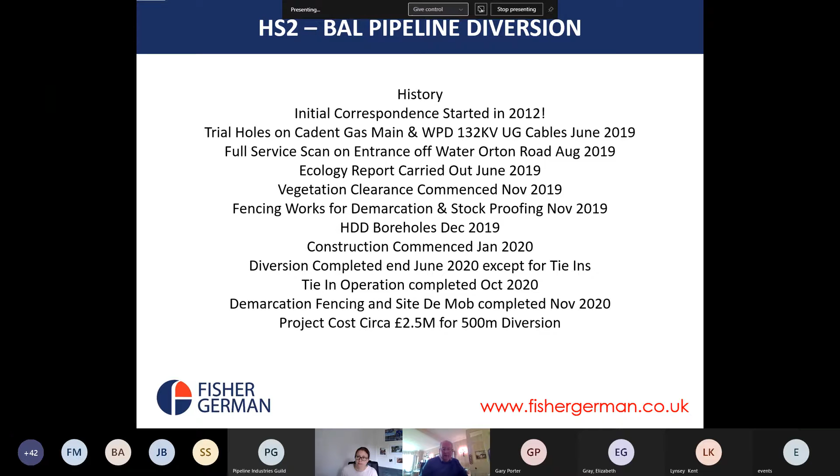So I'm now going to see if I can start this. Yeah, here we go. Has that moved on?

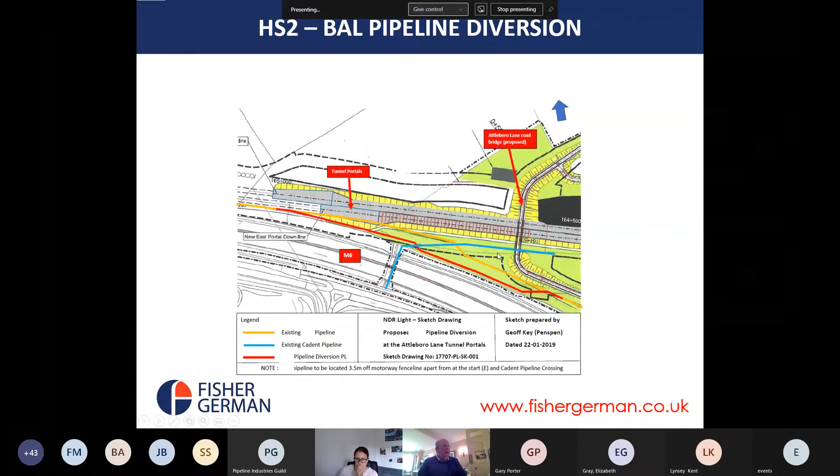In more detail, we've got this tiny slither of land here, which is quite complicated. It belonged to Highways England, and this was purchased by HS2. But we needed to shift into the toe of the M6 to get our distance from the portal buildings.

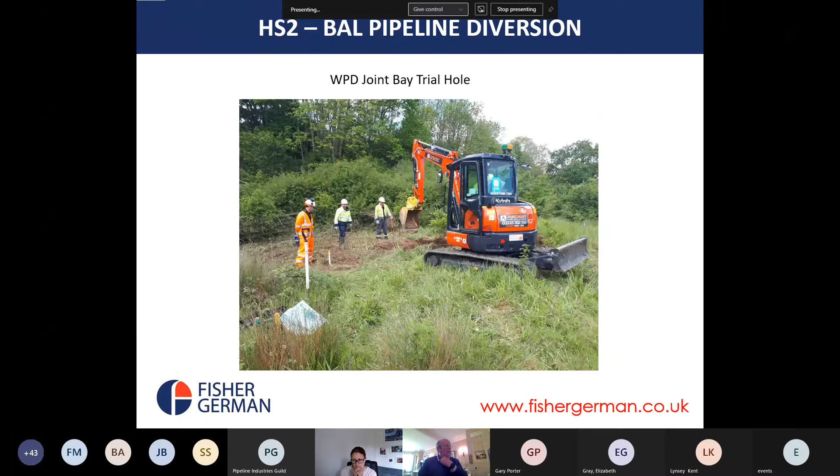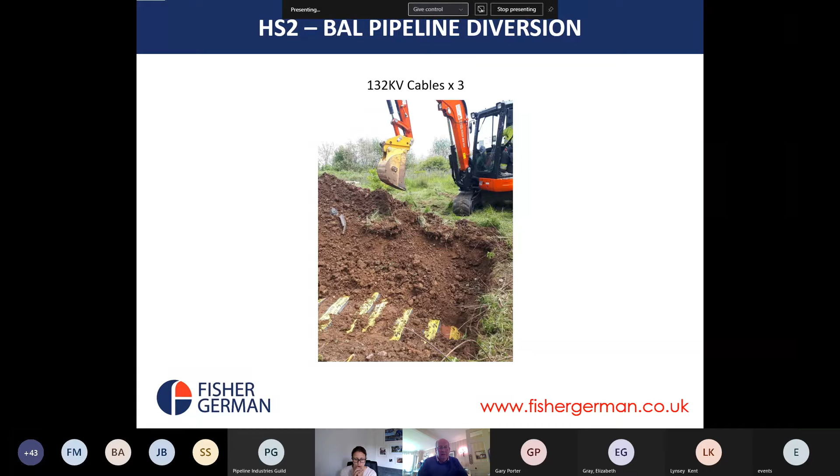We started on site last summer, trial holes to establish where the 132 kV cables were, and we had a complete bank of them. There was a joint bay just behind, in front of the digger, on the other side of the open excavation, with 3 different cables running out of that joint bay.

We also had to trial hole down to the Cadent high pressure pipeline, and we got that to a depth of 2.7 meters, so we could then plan the HDD profile accordingly.

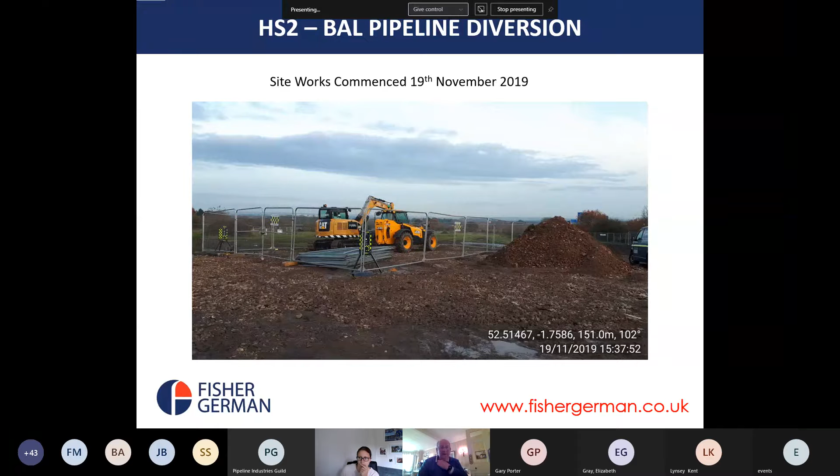Works started on the compound in November 2019. That's the compound there, just off the Water Orton Road here.

We had to remove all the hedges. There were 3 hedges to remove in total, about 20 meters of each section.

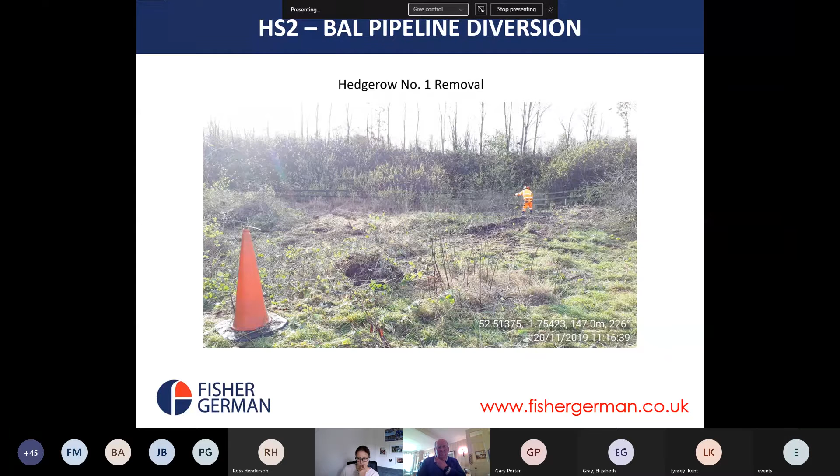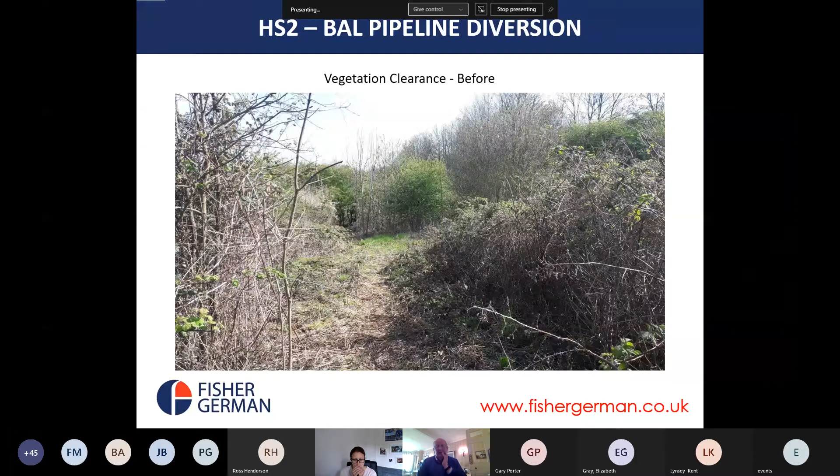This is the vegetation we were contending with. It's highly overgrown and full of brambles and self-set trees, etc.

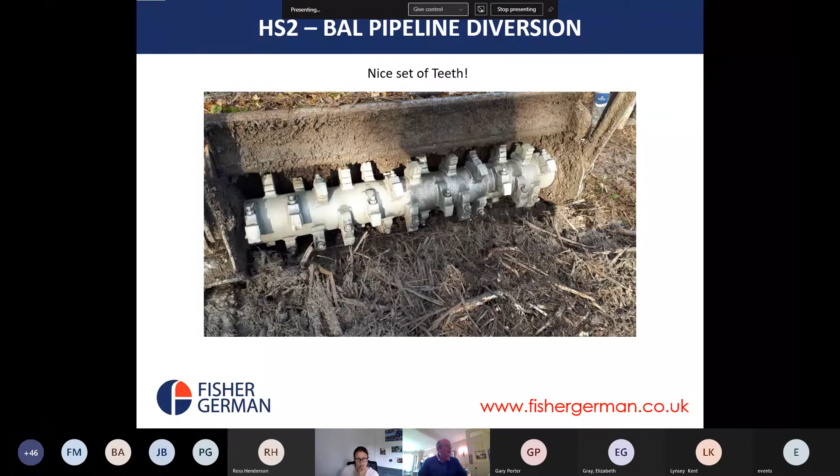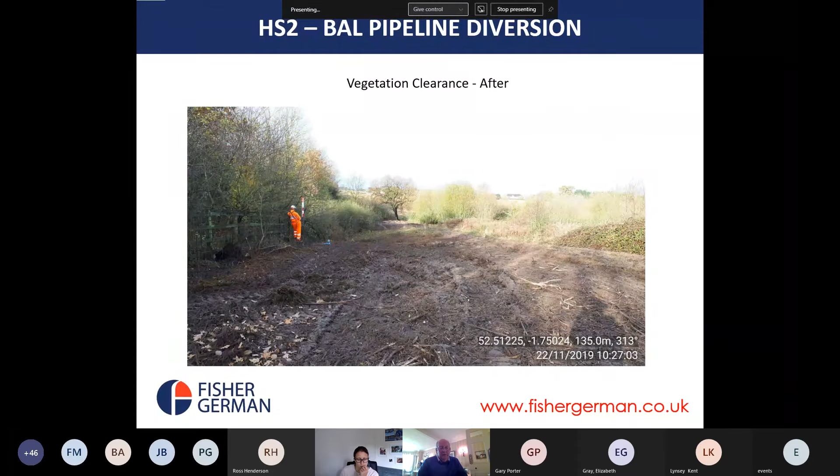That's the result after the machine had been through, it just mulches it all up. If you remember the view from a few slides earlier, it's a completely different picture now. That's the job where the trees were at their thickest.

We then had to remove an oak tree as well. It did HS2 a favour because it was right in the entrance to the tunnel portal anyway, and for those concerned, it was riddled with honey fungus, so it wasn't going to last much longer.

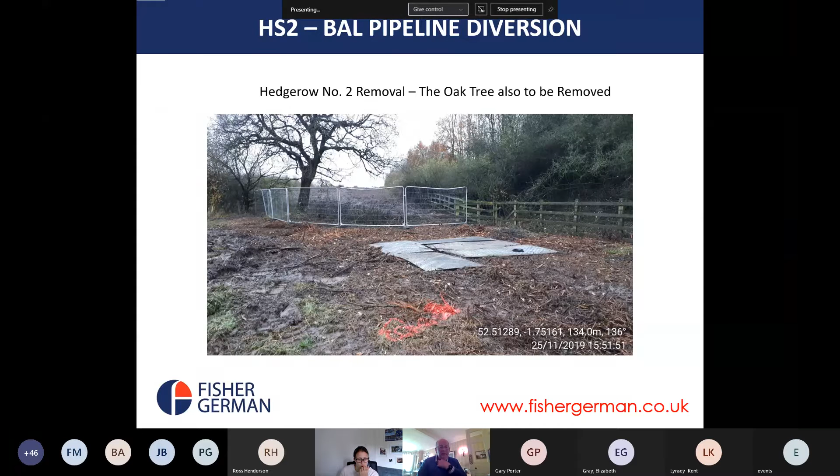Here you can see in November 2019 it absolutely turned into a mud bath. We were trying to fence off the existing easement here to make sure that the running track down to the main diversion site didn't affect the current pipeline easement.

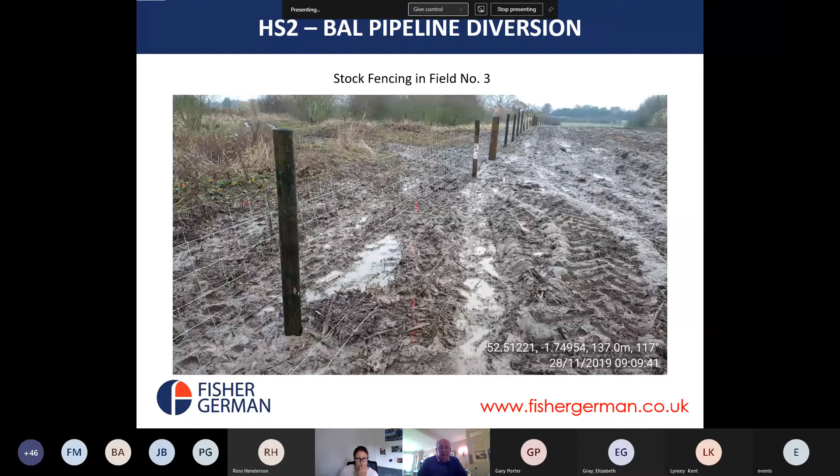Once we got that done, we fenced off the stock in fields 2 and 3. And then this is looking...

...upstream. You can see an aerial marker post here, that was the field 3-4 boundary. And this is our tie-in point, the upstream tie-in point.

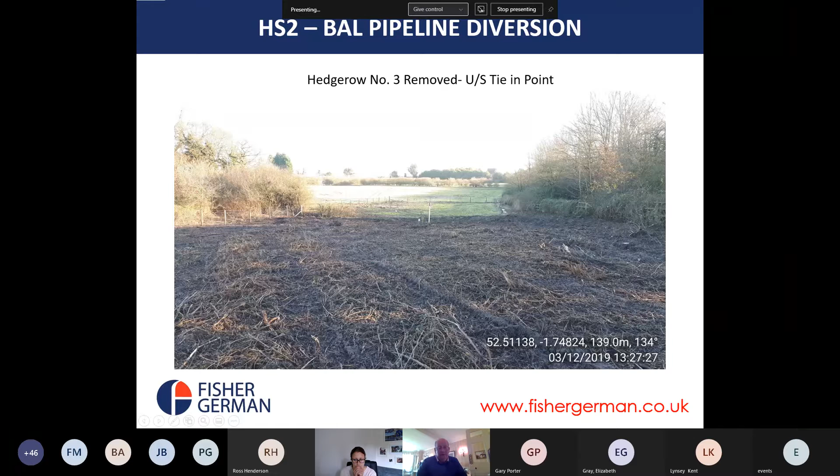And that's what we were dealing with at the end of 2019, an absolute mud bath. But do remember that picture, because it's going to be very interesting when I come to it later on in the presentation.

So this is the downstream tie-in point, and this is the point where we have to go into the highway embankment here and push back up the embankment.

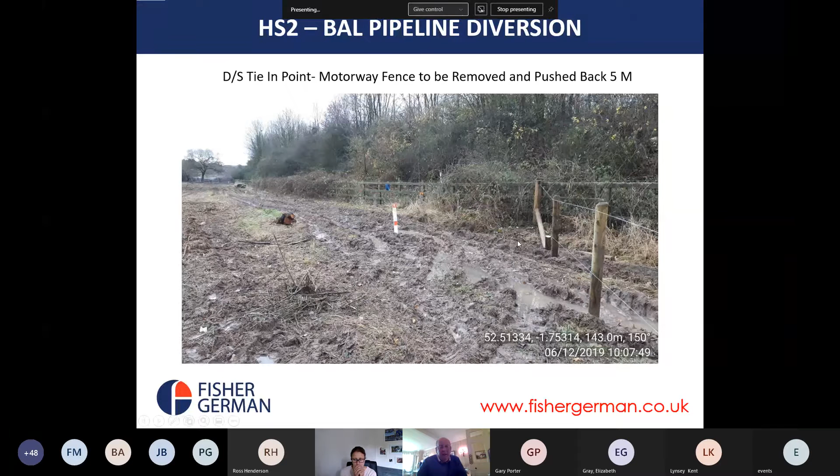So we removed all the vegetation behind the highway fence, got rid of the oak tree, and then you can see the contractors reinstated the highway fence 5 meters up the bank, to give us a 5 meter clear easement in the future.

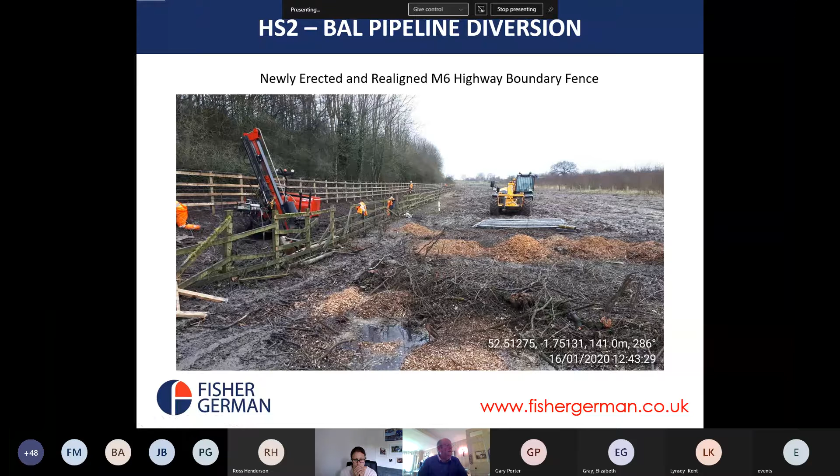So that slither of land has now been transferred, or is in the process of being transferred, to HS2 from Highways England. And that's the job done, fence realigned.

It doesn't get any drier. This is what we had to contend with, or the fencing contractor had to contend with, in early January 2020.

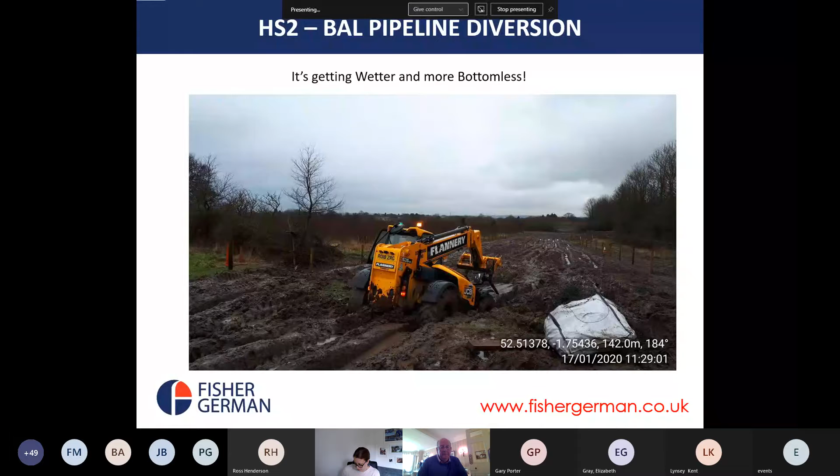The contractor arrived on site on the 21st of January, and the first job was to basically put the bell mouth in off the Water Orton Road into the site.

And then that's it, all stoned up and a smooth, seamless run off the road into the compound area.

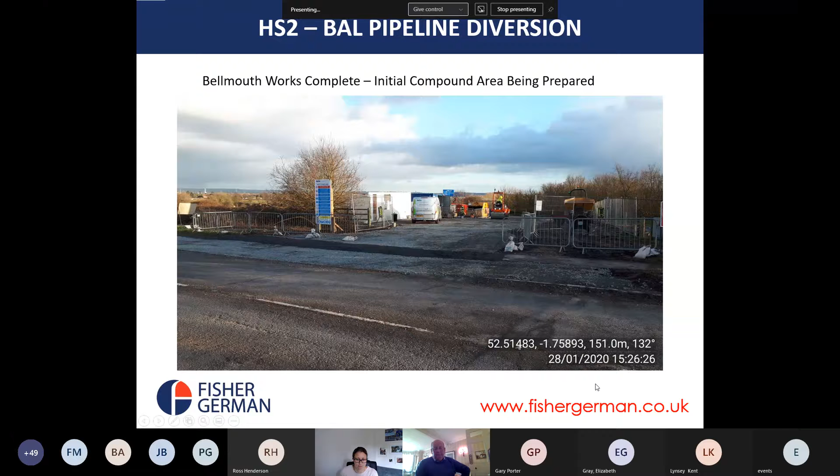We had to lay down terram and stone, and this is to the main construction compound here.

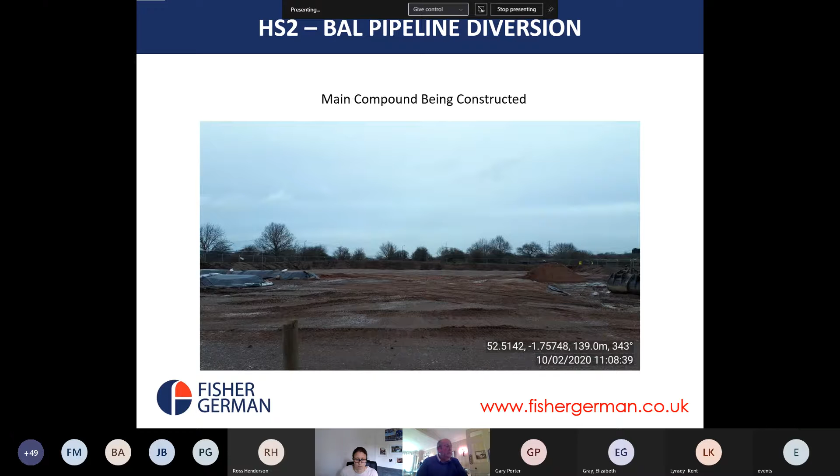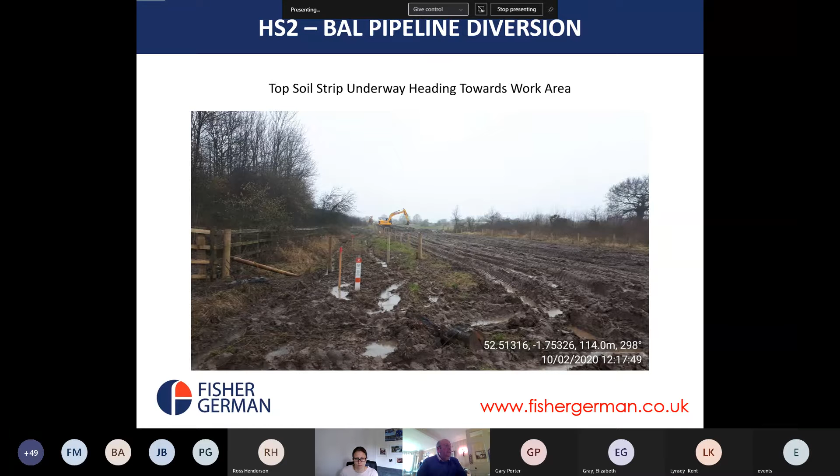Topsoil strip underway, and this is still heading towards the working area. I put topsoil stroke mud because if you remember that previous photograph, it was a lot of mud.

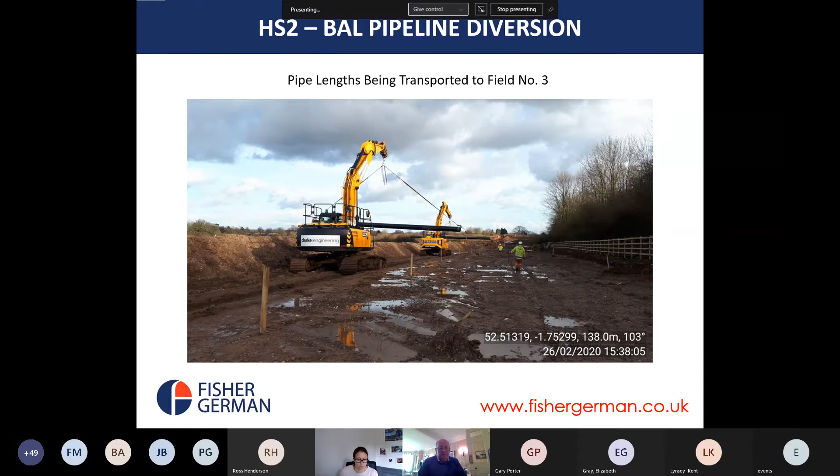This is all the line pipe arriving at the main construction site, being unloaded. Then it's a painstaking process of transporting it down the spread to the working area, for storing up, ready for stringing out later on.

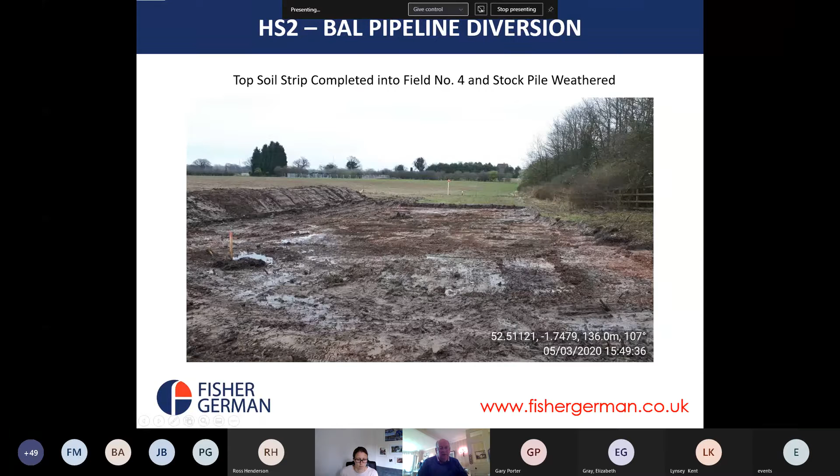Topsoil strip completed now and into field 4, and this is really important to get it weathered, i.e. you smooth it down with the back of a bucket to keep the weather off it. Remember, keep that vision in your memory of the mud, because that's what's underneath that.

And then we've still got to contend with the fact that we've got our existing asset in the ground, so we had to put bog matting down for vehicle crossings on our existing asset.

This is looking downstream from the upstream tie-in point, so the first point where the pipe diverts with the flow of the fuel, and this nicely weathered bund all the way along the edge here.

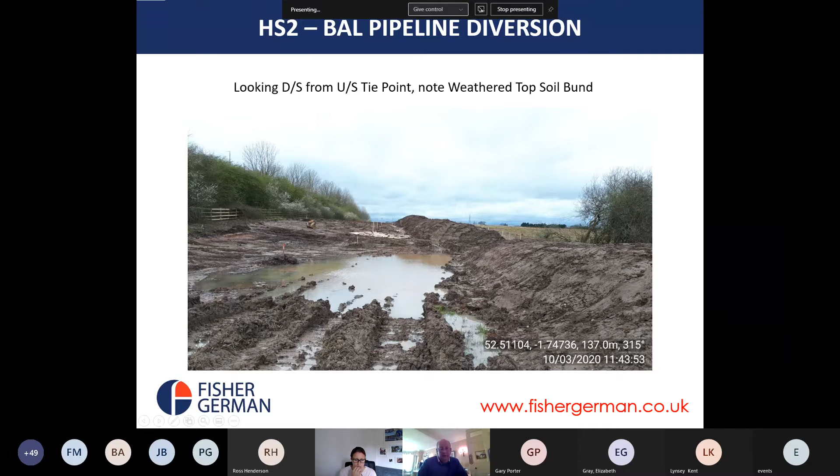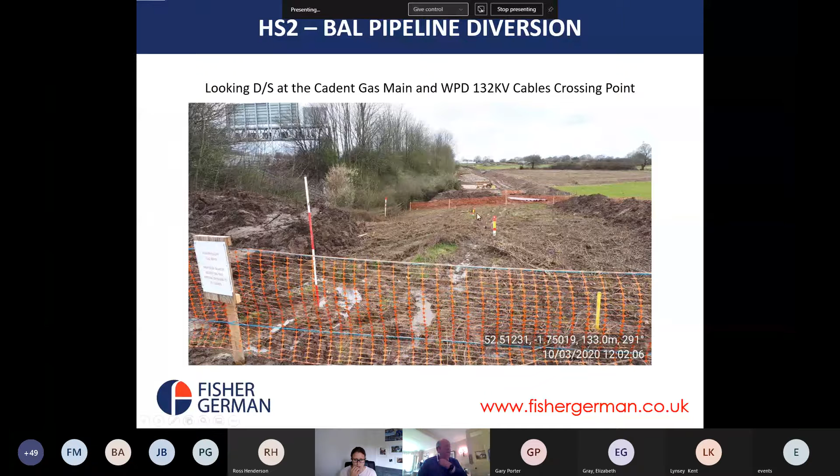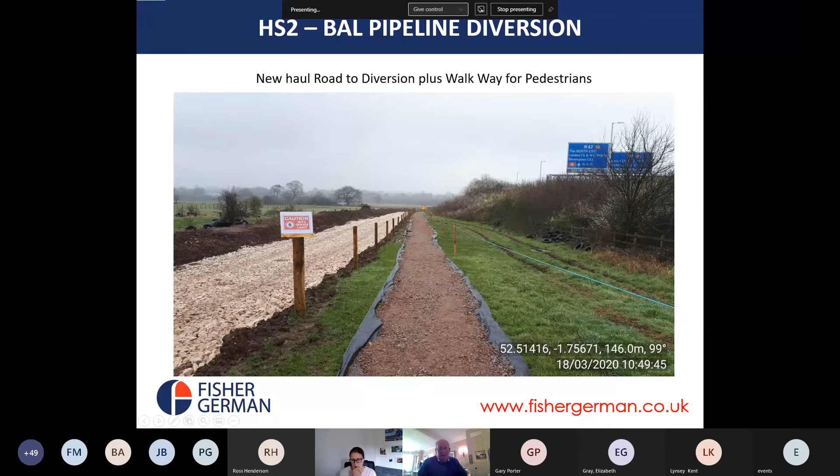You'll remember that the vegetation was extremely thick, and none of our service searches showed up an unnamed storm drain, which we uncovered outside the working area. We couldn't just leave it there, so we had to get a specialist contractor in to deploy a camera and trace the drain, which we managed to do.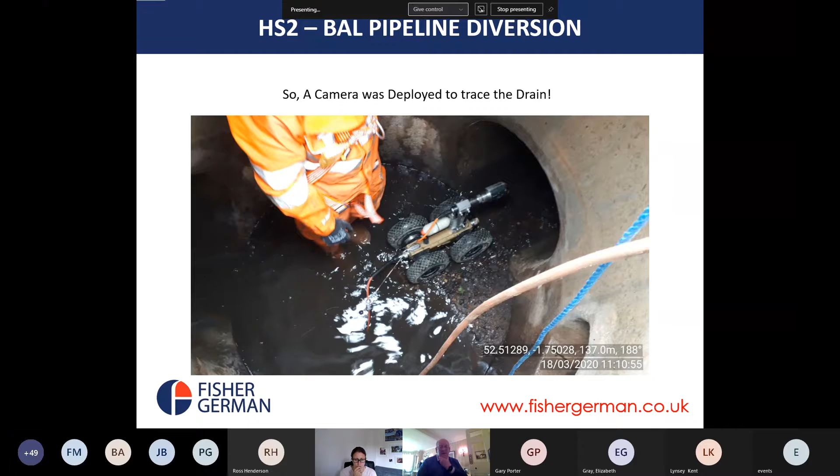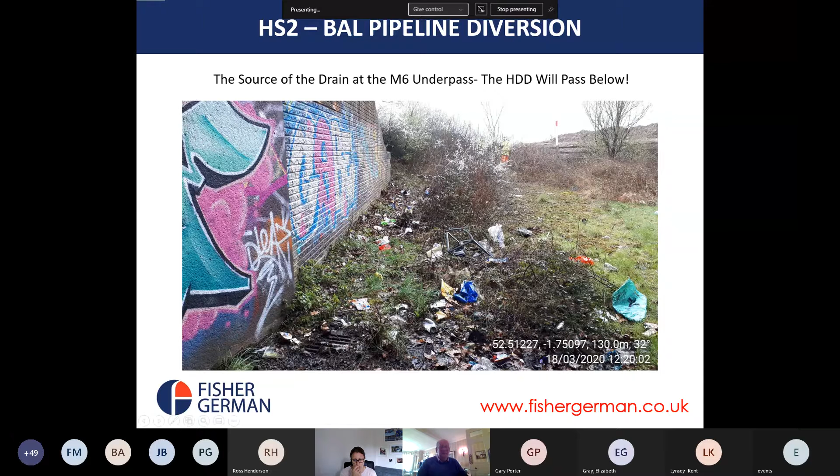They get imagery back to a Toughbook screen of what the camera can see down there, and we found that it emanated from this. If you can see, there's a drain cover there, and that's where the drain ran from, and that's probably about 150, 200 meters away from the drain cover we put the camera in.

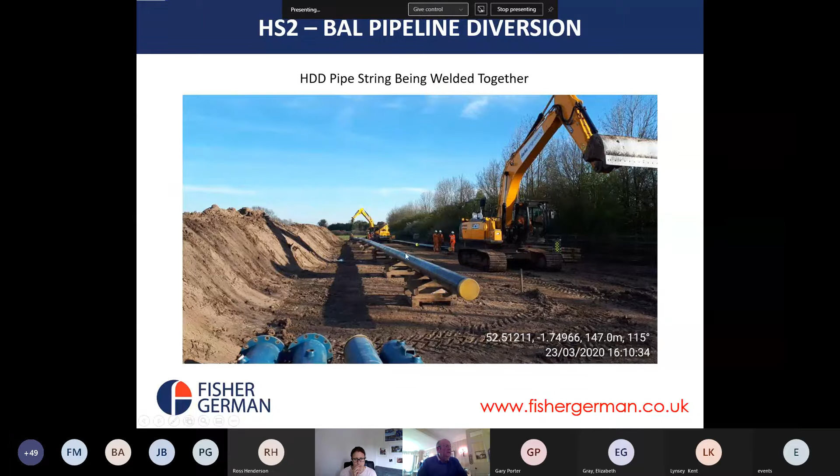Very nice working conditions. And this is the HDD string being put into position, ready for later on.

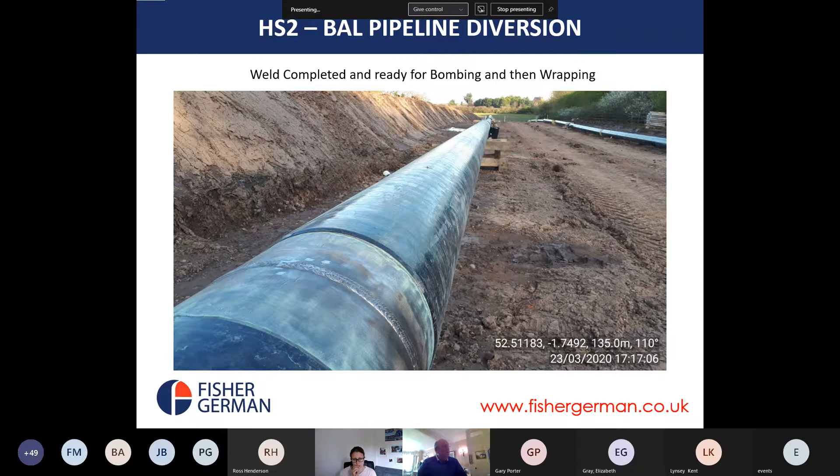This is just a few construction shots of the process of a diversion. So welding up the pipeline joints, and that's ready for inspection, or bombing as they say, or X-raying, and then wrapping, subject to it passing its tests.

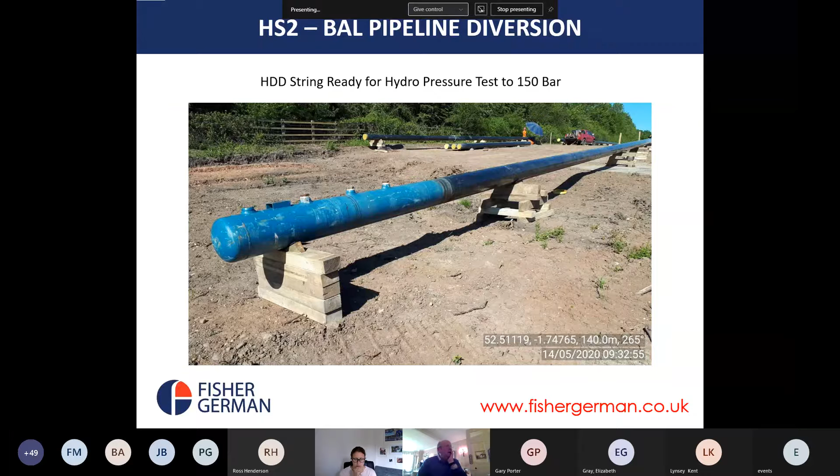So this is the string all welded up, ready for the hydro test, which is up to 150 bar to make sure that it's all going to be okay.

And a nice aerial imagery shot from the aerial patrol, showing this is the HDD string here, ready for pulling back.

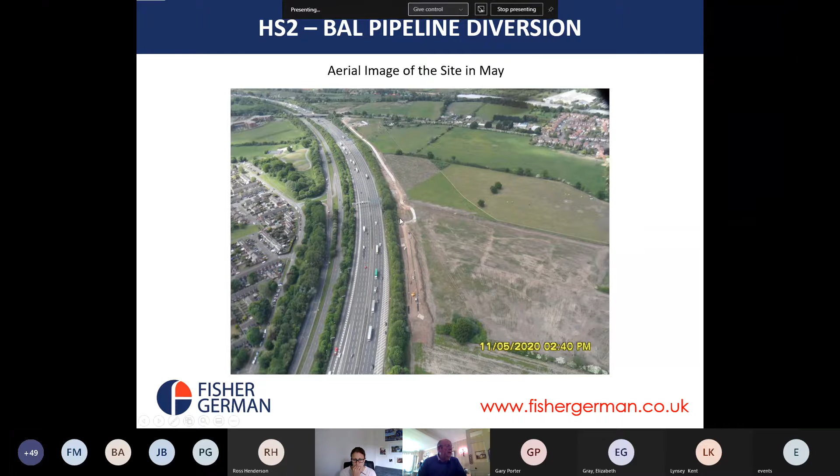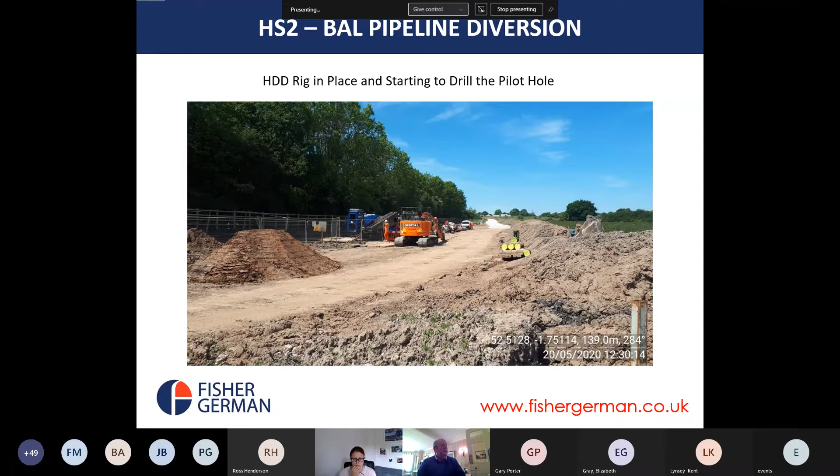And that's the drilling rig in place, just starting to drill the pilot hole, the first shot through, and you can track the head with this device, and you can see that it's actually on the screen. We've got a depth of 11.22 meters below existing ground level for the drill head. So that's well below the Cadent gas main and well below the 132 kV cables and their joint bay.

So that's the first shot coming through. It's come through from all the way down about here, about 150 meters, and come out the ground.

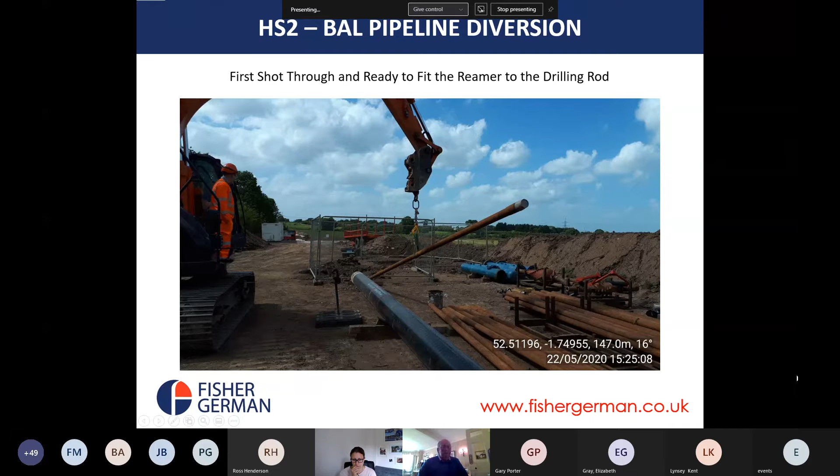That's the HDD string all ready for pulling back. Meanwhile, further upstream from the HDD, we're getting the pipeline trench ready to lay the pipeline as standard in the pipe trench. In the forefront of the picture, you've got what's known as a bell hole, which helps make it safe for welders to weld up the main sections when it's actually in situ in the ground.

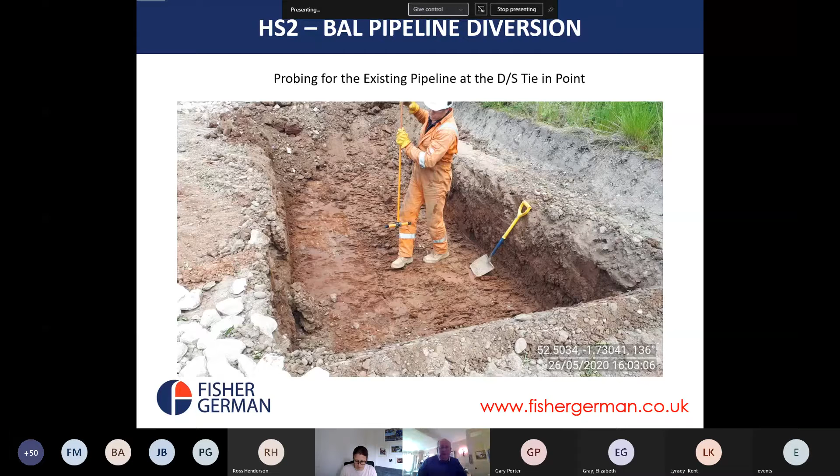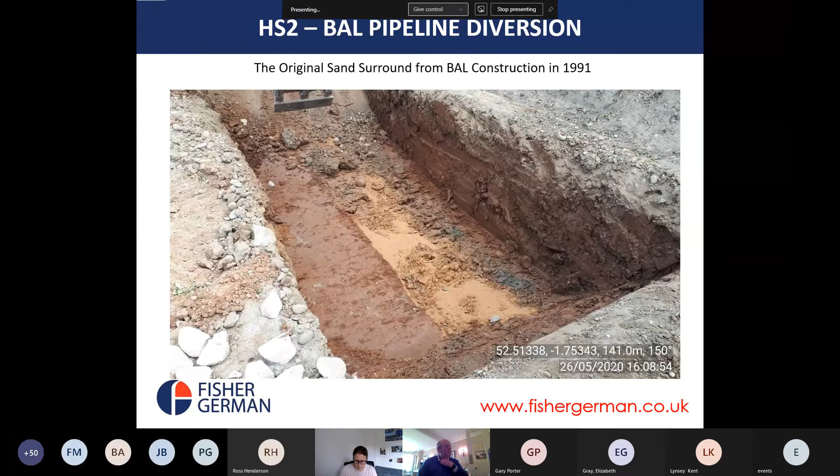This is probing for the existing pipeline at the downstream tie-in point. If you look there, it's very easy to see the sand that was put on the surround from the construction of this pipeline back in 1991. So he's exposed the pipeline.

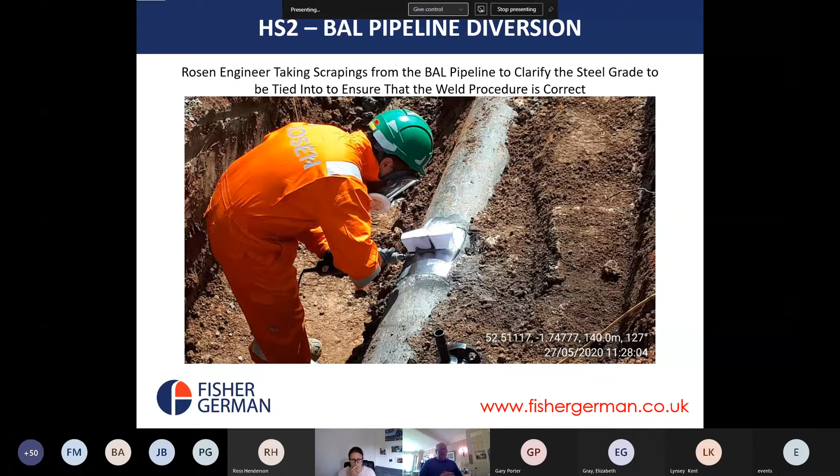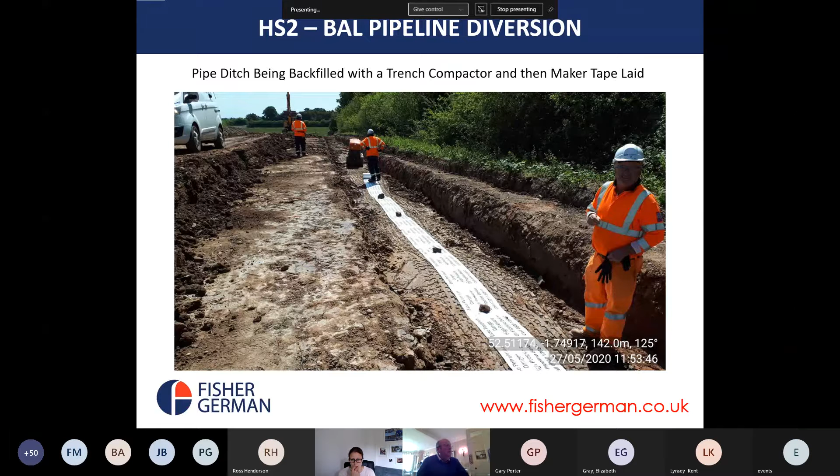That's the pipe being backfilled, the trench compactor, remote control trench compactor, and then marker tape being put above it.

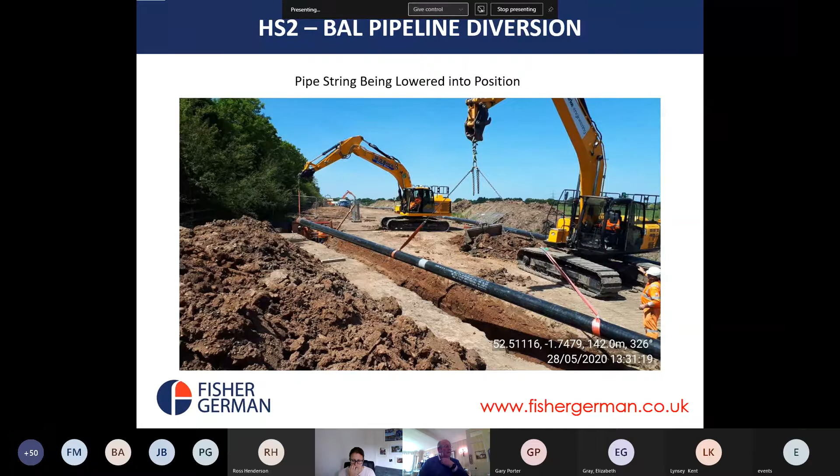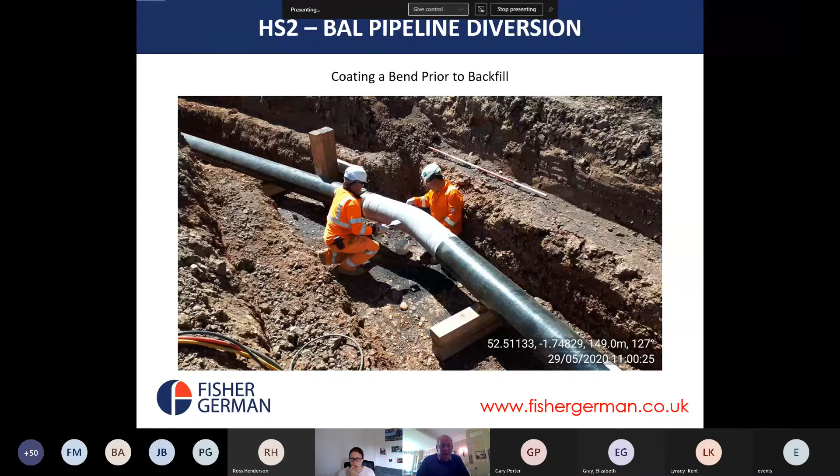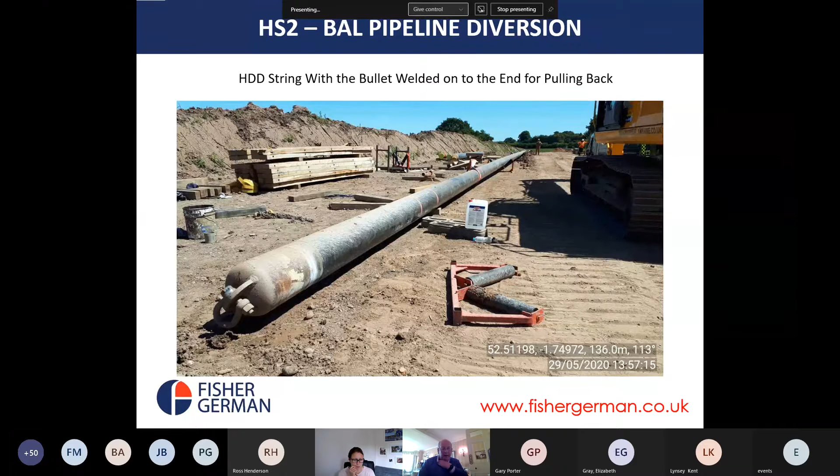And this is the HDD string ready with the bullet welded on the end for the pullback. There's a dirty great big shackle on the front of that to hook onto.

So in order to get the correct angle, we had two 20-ton machines in position to lift the pipe off the runners, and that gives you, if you get it high enough, the correct angle to pull into the ground. That's the trajectory it will continue into the ground at.

And that's being shackled up, the bullet shackled up, ready to go. You can see in this picture the back reamer here, and this will rotate as it goes in.

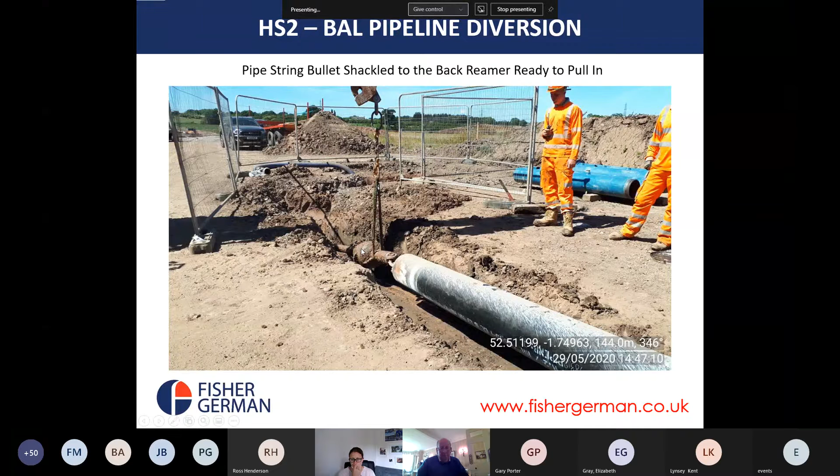It's another shot. And that's the job done. Pipe string successfully pulled through the HDD profile. So we can say goodbye to the rig, job done.

And that's what we're left with, a piece of pipe sticking out of the ground. And that's ready for the next stage.

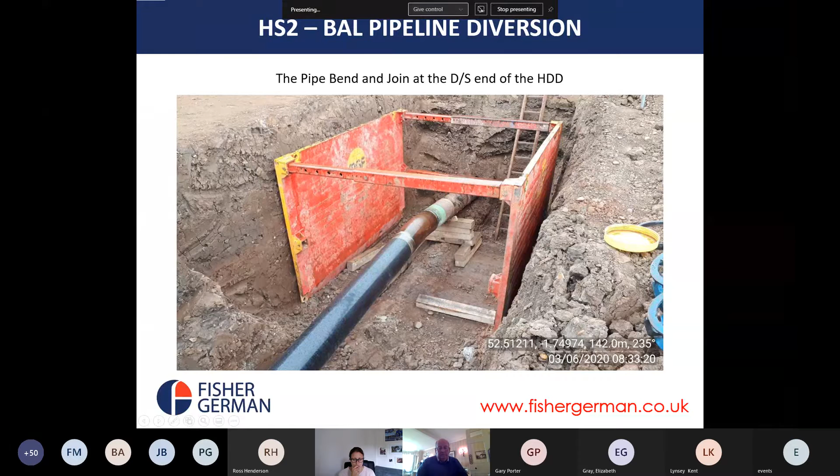So we put on the bend, a 22-degree bend, to get it to the right position, so you have to dig down the pipeline a bit, then cut it and weld it in. It's just a change of direction here.

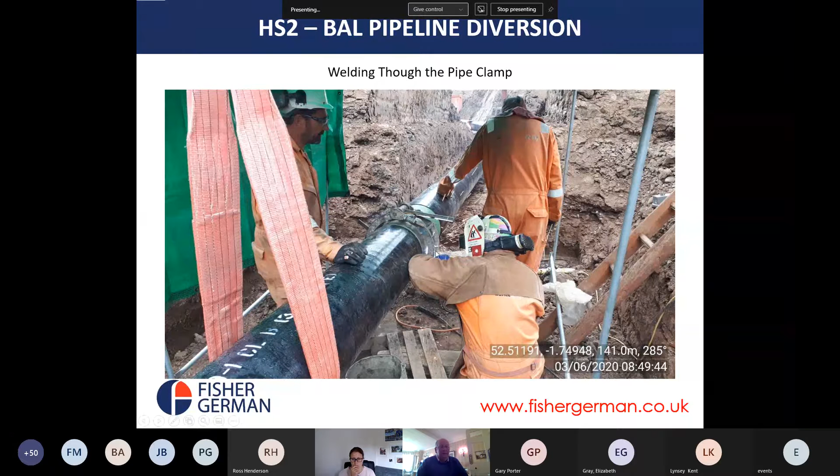This is a close-up. They have these open clamps which hold the pipes in position for the welders to weld through the clamp. And that's it just being completed. You take the clamp off once you've got it started and it's all secure and in the right place, then you can complete the weld.

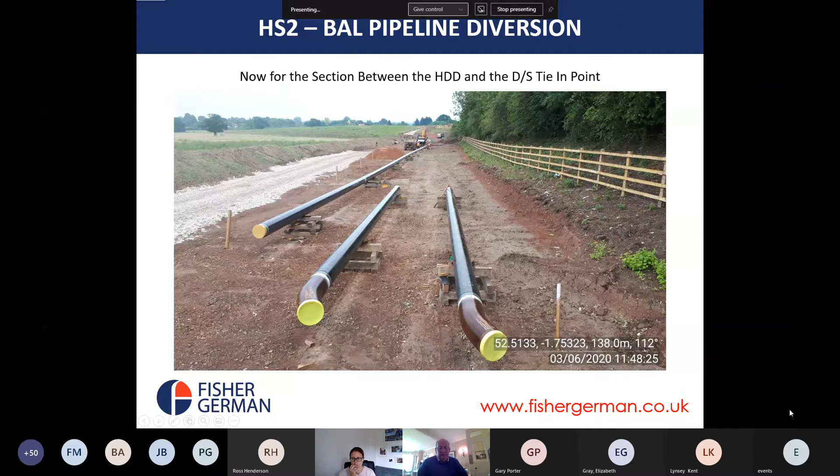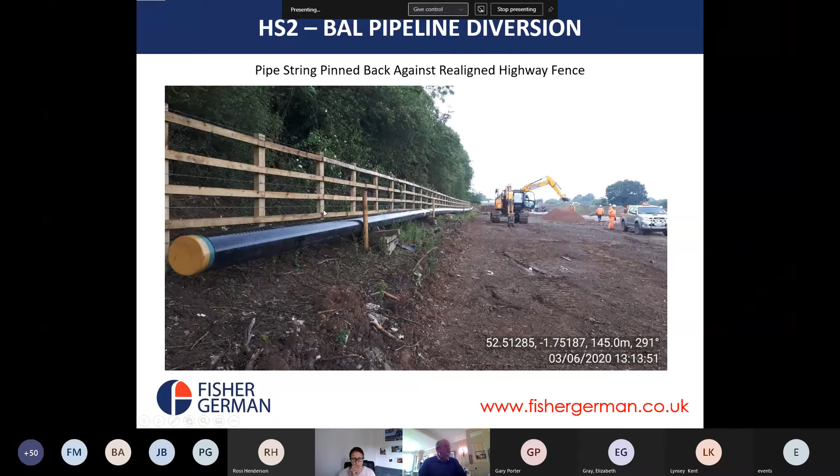Now for the section between the horizontal directional drill, which is down here, and the downstream tie-in point. If you remember, this is the area we claimed back from Highways England, so we had to peg the pipe back up against the fence here. This is where the trench is going to go.

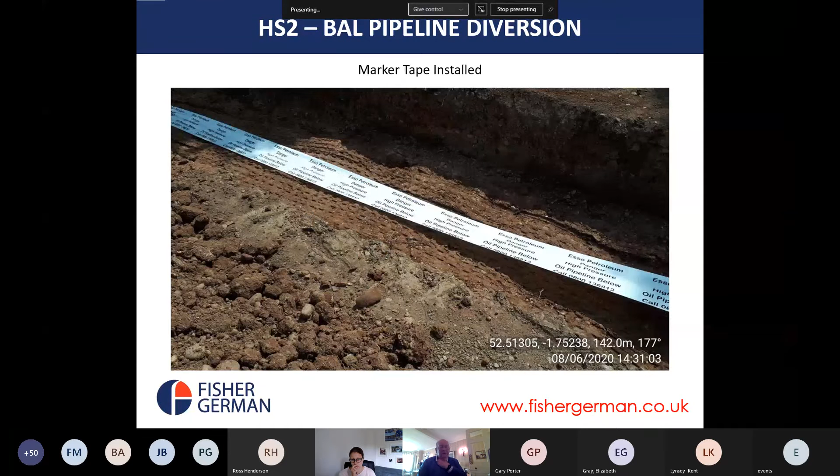So the topsoil reinstatement commenced just downstream of the upstream tie-in point, and I will now refer back to the image you saw of the really wet conditions and the topsoil being put into a bund which is weathered. When you do that, your soil will come out in good condition for reinstatement.

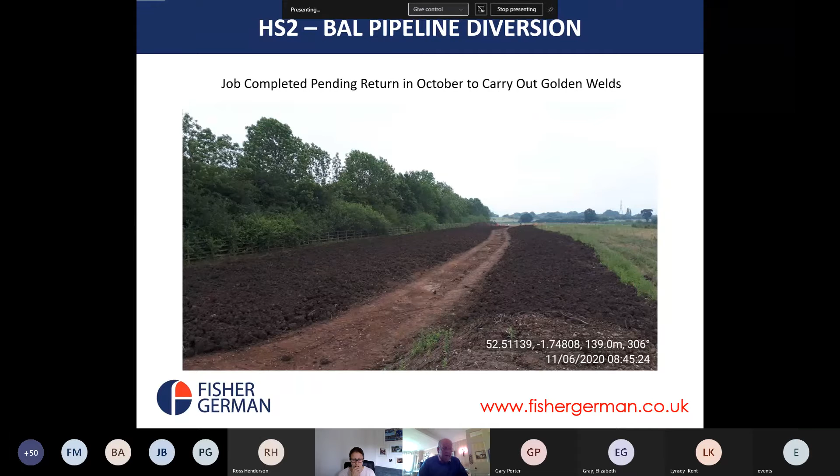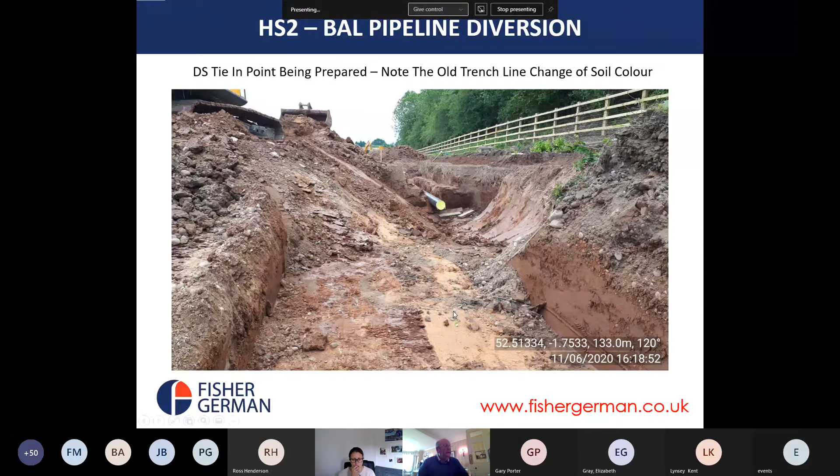And that's the bend line up that was welded up back in the summer and kept on site to go from one pipe to another. So you still have to do the pressure test on that little bit.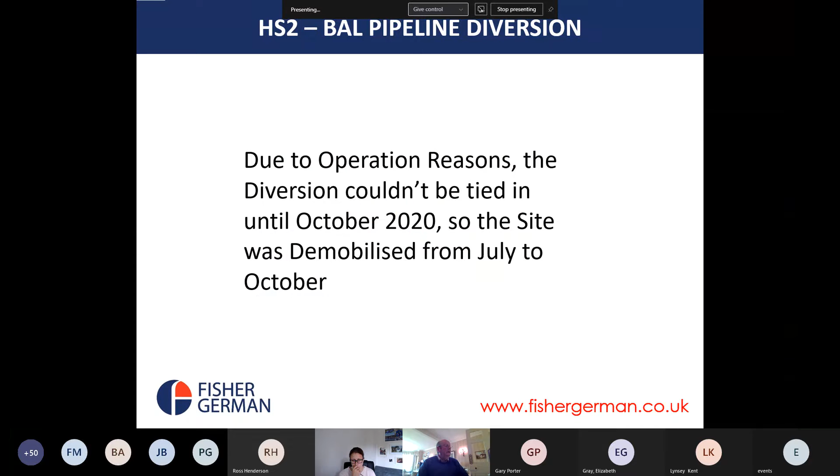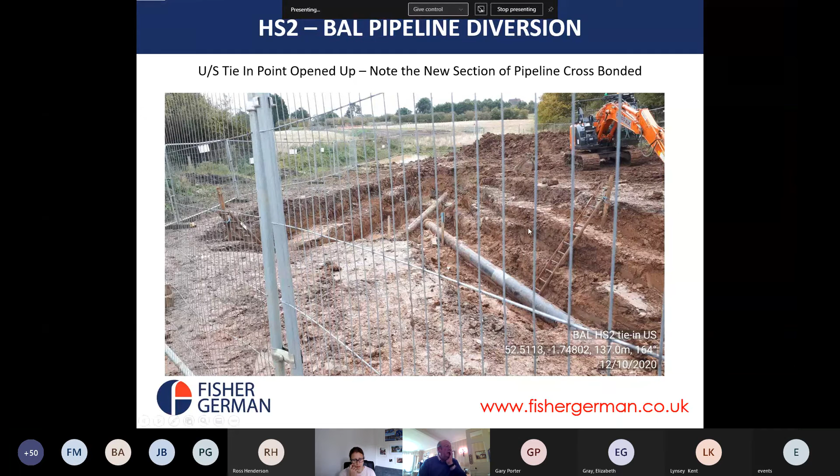Right, this is the tie-in point, week commencing the 12th of October, back to wet weather. So we exposed both pipelines again. So we've got the existing one here, and this is the diverted section.

And again, at downstream tie-in point, this is once you've cleared the pipeline with nitrogen gas, this is actually tapping into the existing line to prove that it's empty. And then once you've done that, you can cut the section away, and therefore we've got this, the old pipeline, and this is the new bit.

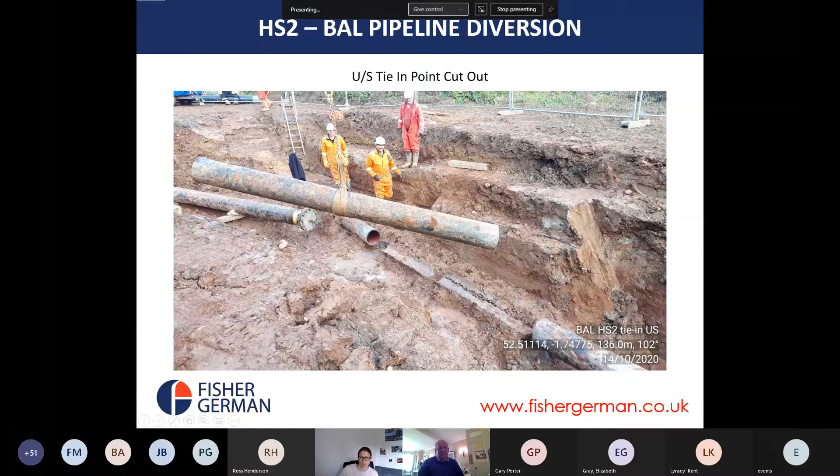And this is a pipe being prepared for welding, and this is a good bit of kit here. Now I'm a farmer also as well as being a pipeline agent, and when I had one of these in my workshop, it was called the hot spanner, but it actually is an oxyacetylene torch, and you can crank it. There's a little handle there, and you wind it round on these wheels, and it gives you a nice cut at the right angle for then dressing out, and then in preparation for welding.

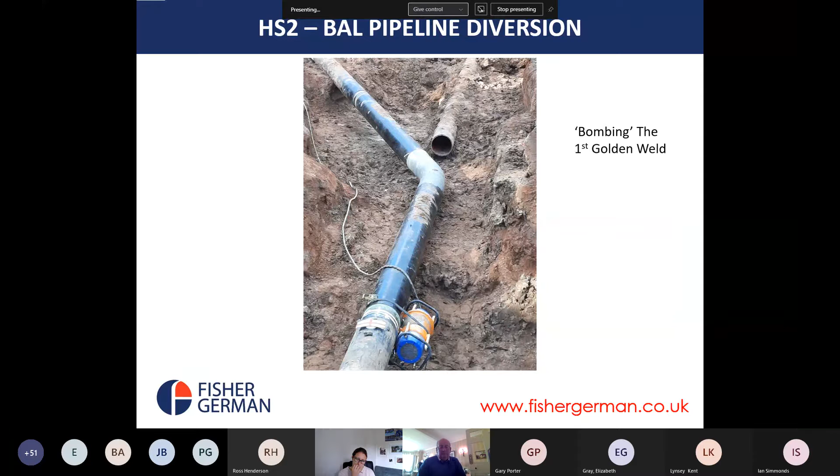And that's the golden weld completed and ready for X-ray, and that's the X-ray machine. We call it bombing in the trade, for the first golden weld. And that's the job done at the upstream tie-in point.

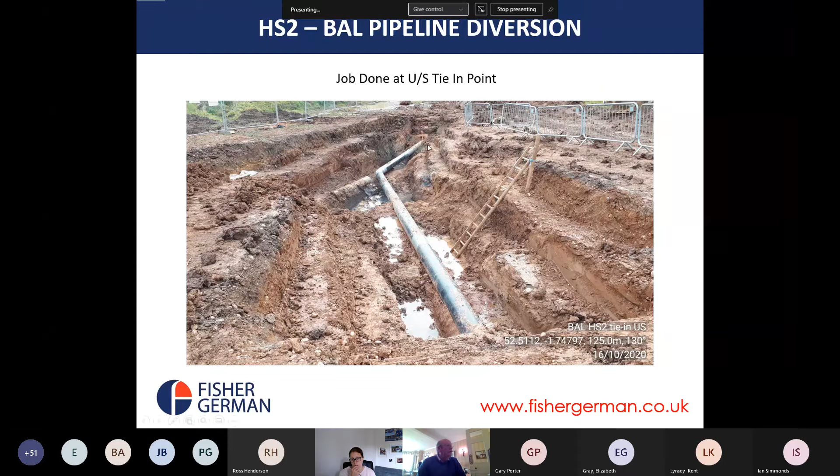So we've got the old route there, the new route coming in here. Sorry, there's the old pipeline there, and that's the new one there. Same thing at the other end. We've got the end cap being taken off that we Densoed up back in the summer.

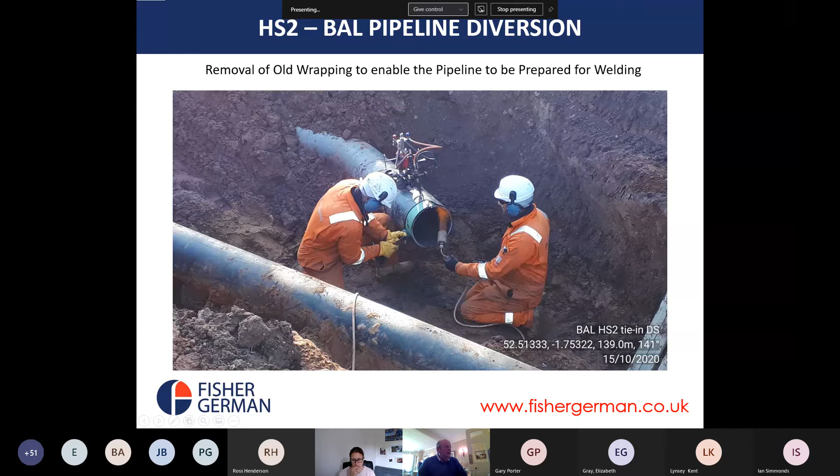Again, preparing, we're heating up the pipe there to remove the old wrap, and then again using the same device to give you a clean edge for dressing out for welding. And that's the bend being offered into up to the tie-in point. It's all clamped into position and ready for welding.

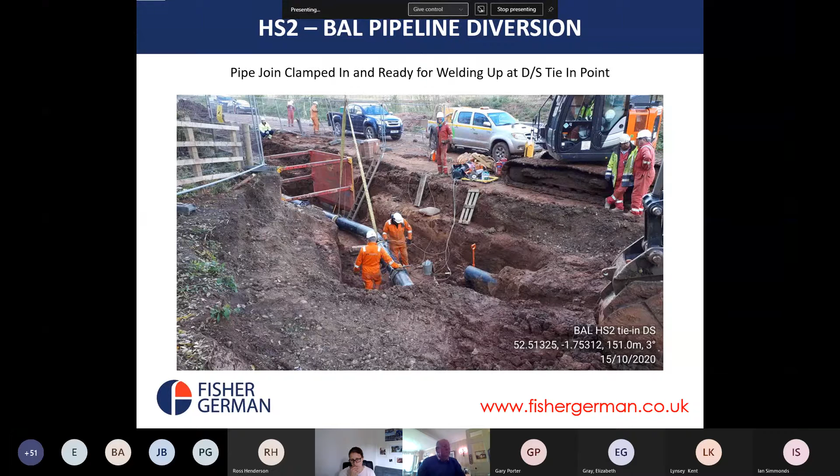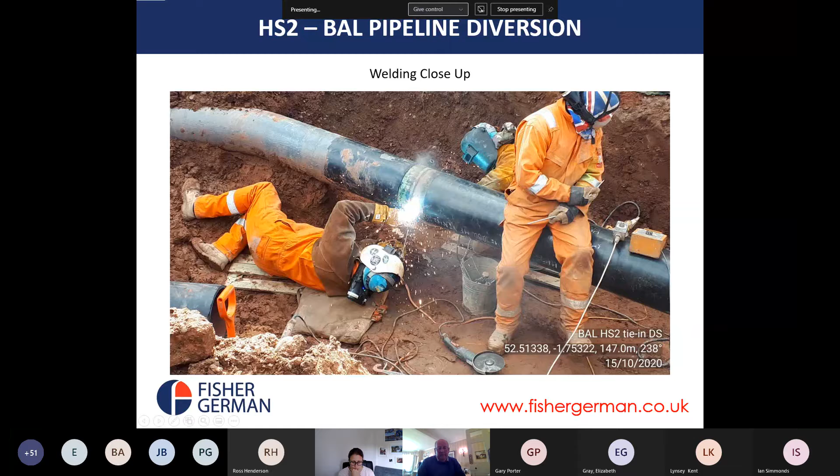These guys, I don't know how they do it, but they are fantastic at their job. It's not an easy thing to do, a proper weld lying on your back upside down. And there we are, job done at the downstream tie-in point, and you've got the old pipeline there.

So then we agreed with HS2 that we weren't going to remove the old pipeline. We're just going to grout it up and abandon it in situ. So this is all the pipe grout and the machine ready to fill it full of concrete effectively.

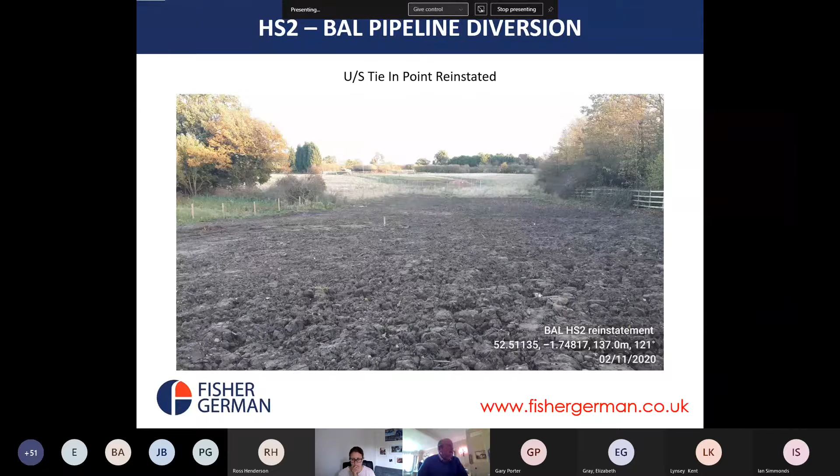And then this is reinstating. This is the upstream tie-in point. Given the fact that the date of that photograph is the 2nd of November, that's not bad. And that's looking back downstream, reinstating all the topsoil again.

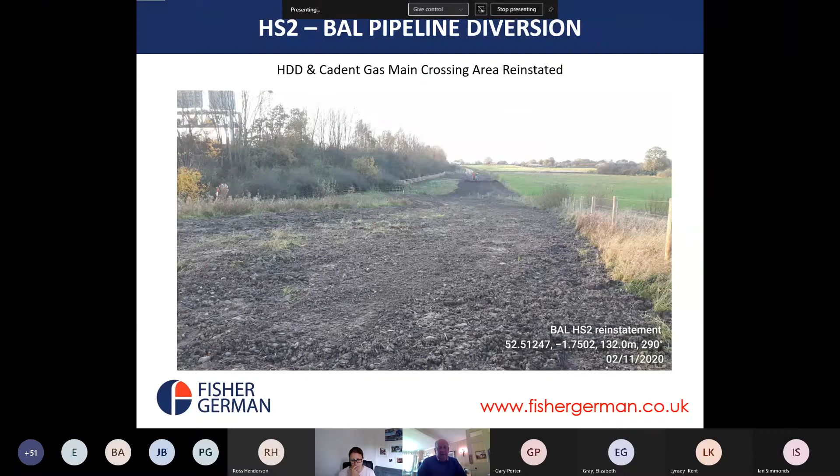Once we'd done that, we had to install a demarcation fence to protect the new pipeline, because basically all this area where this spread is going to be is where the tunnel portal is. So we got the contractors back in to put another fence up.

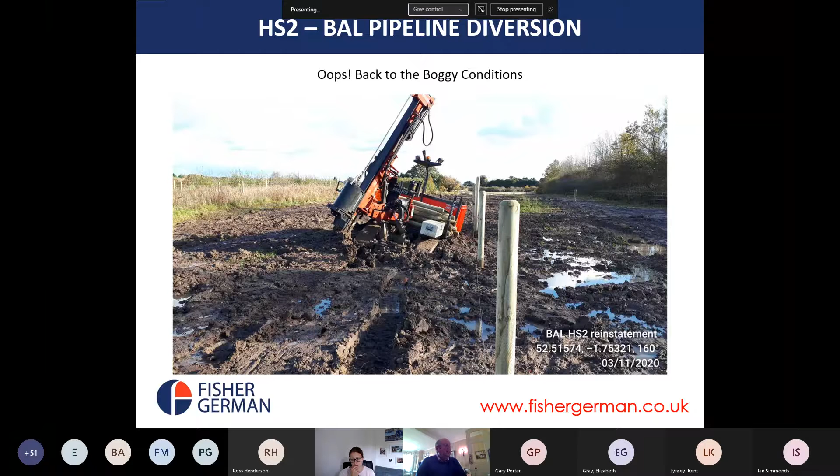You'll note that it's the track machines, and it's a much lower ground pressure, and therefore much more effective getting through the mud, or not, as the case may be. We're back into really boggy conditions, and this is the tracked post knocker, well and truly stuck.

But this machine, sort of a quad track forklift, was amazing. It could go anywhere and do pretty much anything, and it managed to get this out of that quagmire and back to work.

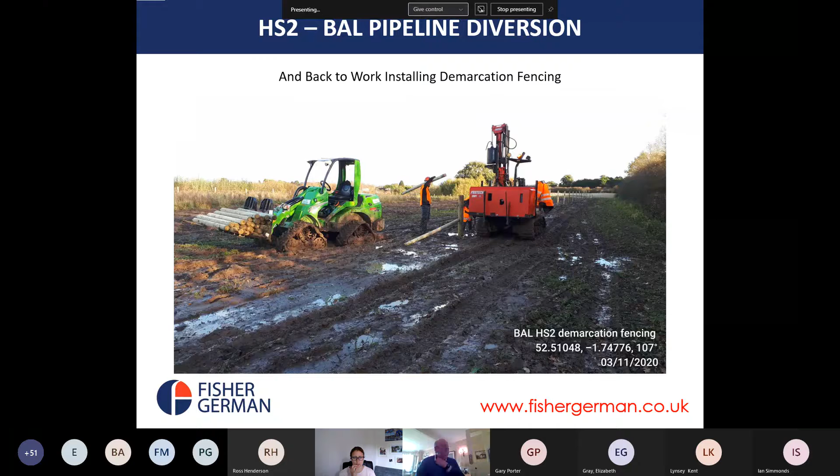Then we started removing the haul road. Had to take that away, and then this is reinstating where the haul road was.

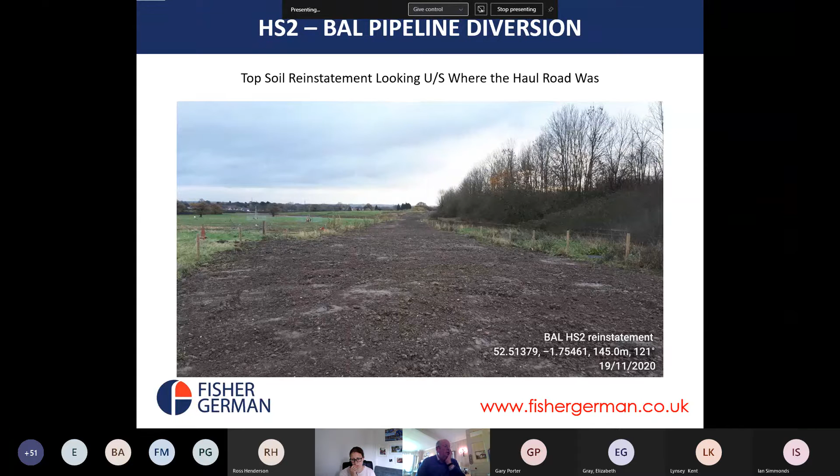Given the fact that this is now the 19th of November, and that is all good, friable soil, which can then be prepared, ready for seeding, to reinstate it back to agricultural land. And that's how we left it.

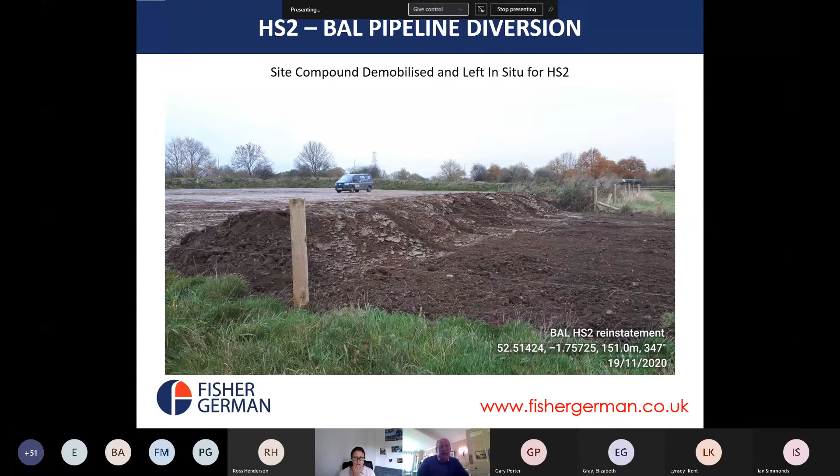The site compound demobilised. HS2 are going to take the benefit of that when they start their works, when they started their works this year.

That's the end, folks.

Thanks so much, Guy. That was a really thorough presentation and covered lots of things. It looks like you've experienced everything, and you managed to get through the whole thing without even mentioning COVID.

Well, which must have hit you part way through. We did have to comply with COVID regulations, and it did actually stop the site for a month. At the end of March, we stood down for a month, but then when we got procedures in place and temperature scanners on site, the first thing that would happen when you turned up to site was you'd have your temperature taken, and if it was not normal, you were sent away.

So we've had some questions, and I'm going to read some of them out to you. Unfortunately, because we're on Teams rather than Zoom, I can't see where the people are or what companies they're from to ask the questions, so that might have offered us some context, but I'll start with them. I think the most relevant one to start with first was, which one was it?

Joanna Hill has asked, was your entire working area, including access and compound, within the HS2 CPO boundary? Yes, it was. So, because that might help answer the next question, which was, what ecological surveys were carried out prior to the vegetation clearance, and did you have any constraints from those surveys? No, there were no constraints. There were flora and fauna surveys, basically, and wildlife habitat surveys.